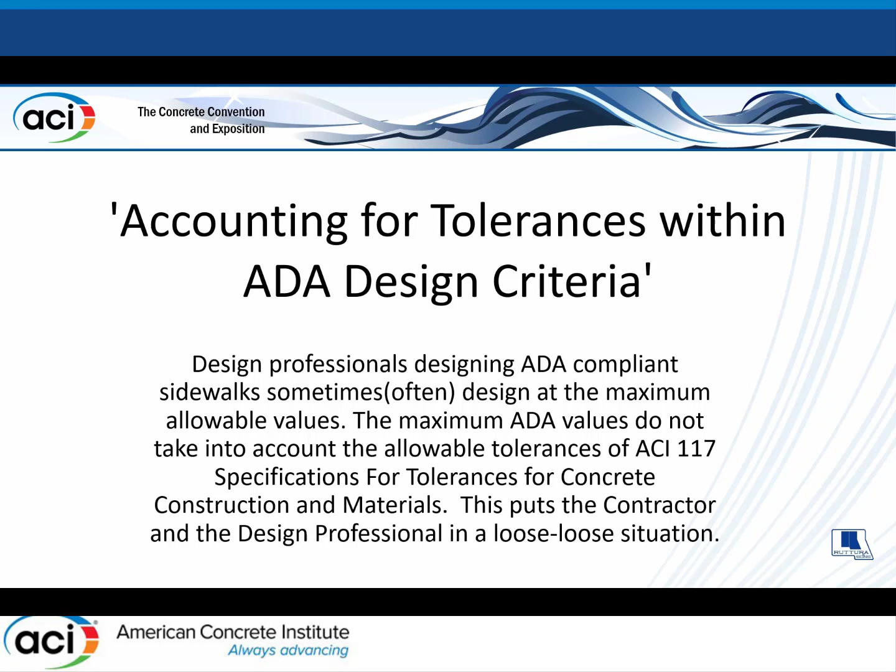So what are we going to do about it? What's the design criteria for sidewalks and ramps? We have 3 numbers we're going to talk about today. If you don't mind, I'm going to step down because I can't stand up on platforms, it aggravates me a lot. So 3 numbers we're going to talk with.

We're going to deal with cross-slope, 2% cross-slope on sidewalks. A lot of people don't realize that if there are blue lines on asphalt pavement or concrete pavement, the 2% is effective there also, in parking lots. Almost no civil designers are designing for that. They just throw contour lines on the ground, and we miss it.

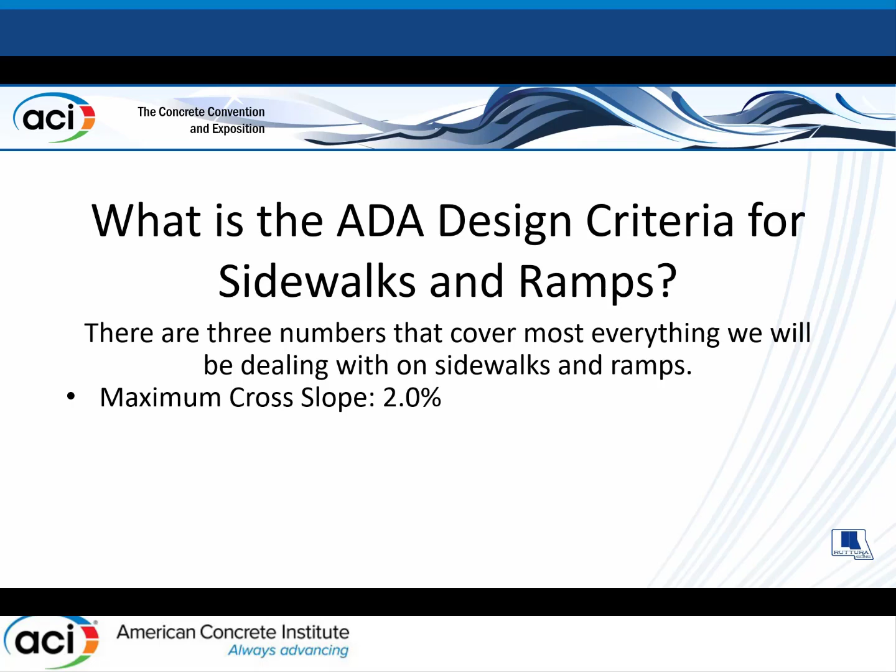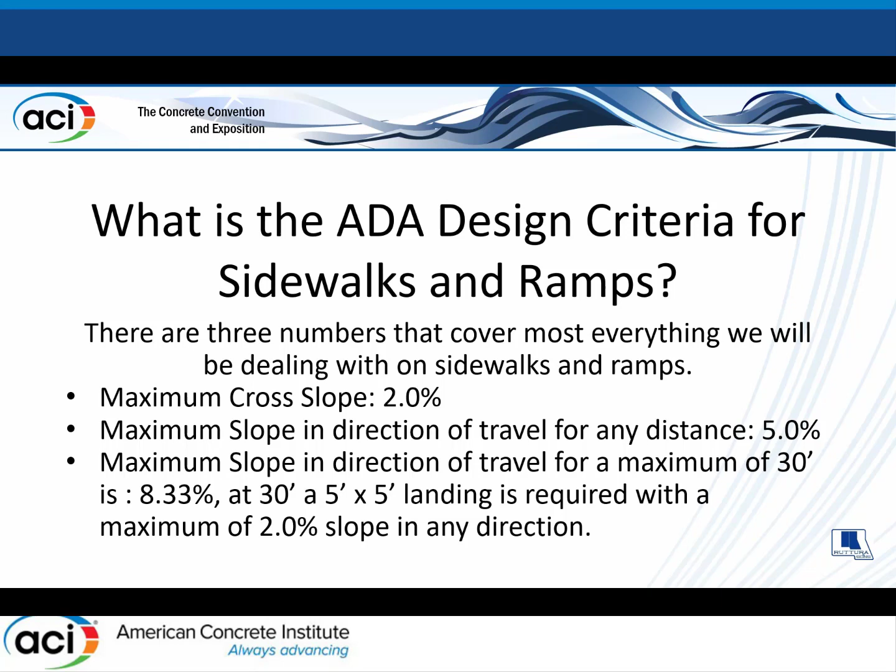Maximum slope in direction of travel for any distance: on a sidewalk, 5%. Maximum slope in the direction of travel for a maximum of 30 feet is 8.33%. At 30 feet, you've got to have a 5x5 landing with a maximum slope in either direction of 2%. It's confusing.

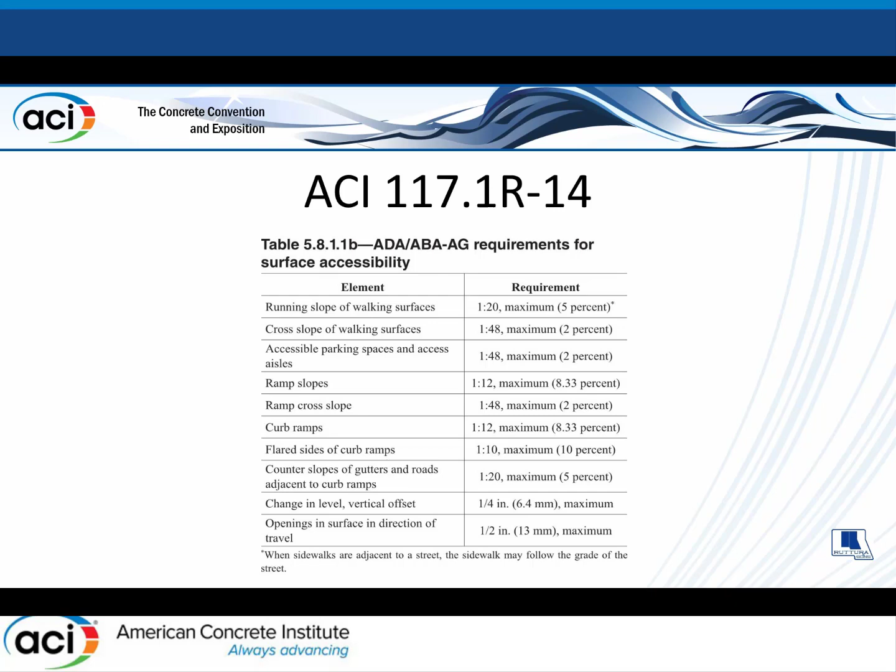117 lists the same requirements. They also add in a 10% for flares at curb ramps. So when you go through a handicapped crosswalk, you could have 10% on the flares on the side.

So what's a reasonable tolerance? The Federal Highway Administration has a best practices guide. For new construction, ADAAG 4.7 permits a maximum curb ramp slope of 8.3%. However, in practice, 8.3% is rarely treated as a maximum, but is used as a design standard that does not allow for construction tolerances. Therefore, rather than using the 8.3, design the curb to 7.1 to allow for recommended construction tolerances.

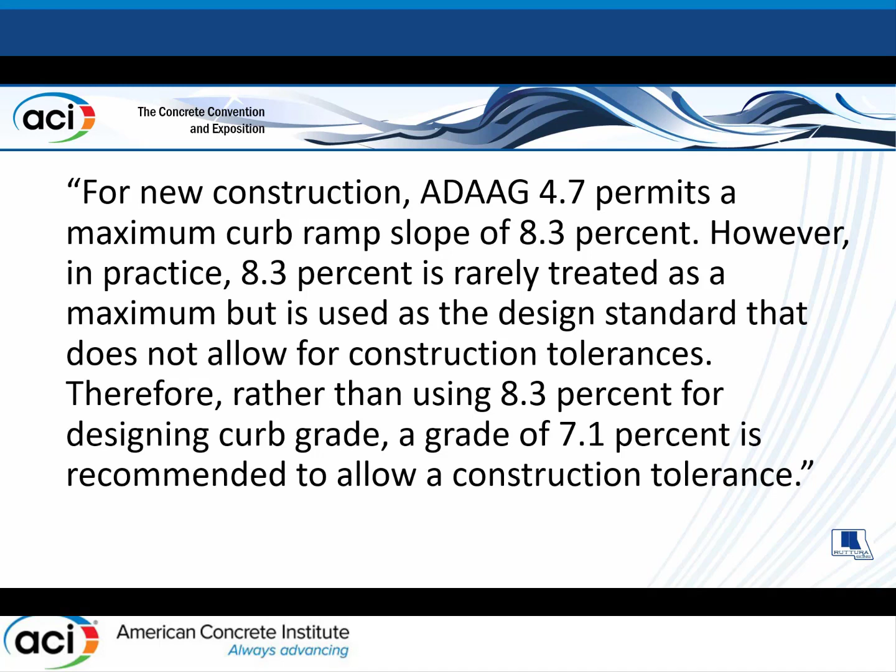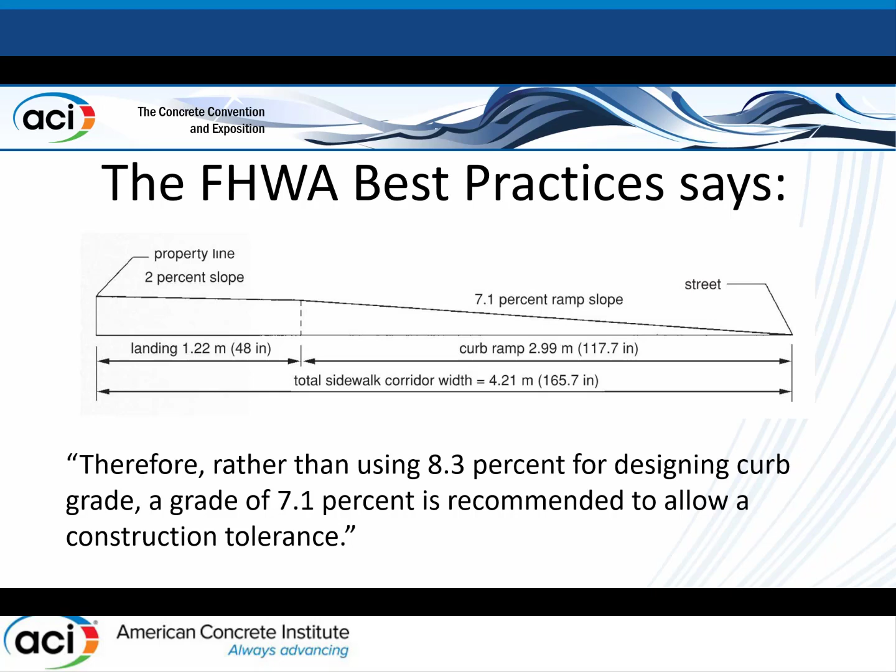Can you imagine a federal agency said that? How nice is that? Refreshing, right? So they're saying design the ramp for 7.1%. Nobody's doing it, everybody's doing 8.3. Contractors just build what they did, right? We're not that smart, you know? We try to do a good job, try to finish it nice, and a week later a guy comes out with a level and checks it, and we have a problem.

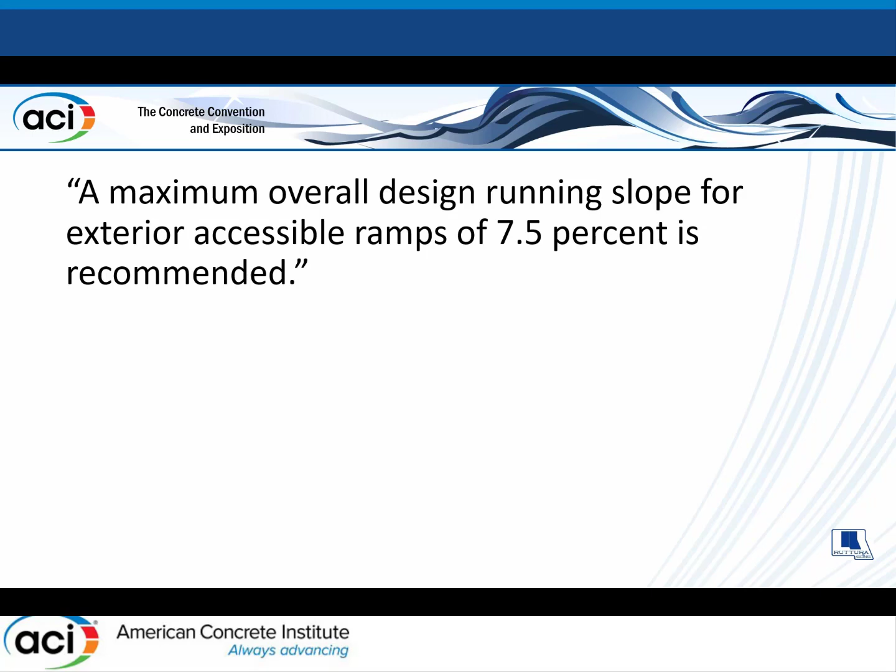So 117 says maximum overall design running slope for exterior ramps should be 7.5%. Well, I like the federal government's pattern better, they say 7.1. Maximum on cross slope, they're recommending 1.5, so you have 0.5% to play with. What's reasonable? A cross slope of 0.5%, 1.2% in any direction of travel, we agree those are reasonable, we should be designing to 1.5, right? On the cross slope, we should be designing to 3.8 on 5, or 7.1 on the 8.3.

The designers are in the room. Do you guys design for slopes allowing for tolerances? Not really, right? We put the maximum on the drawings.

Right? So a lot of times these ramps are between two walls. You've got a handicap ramp sliding coming out of the building, making a 180 degree turn, coming back down. You've designed the walls to fit in a certain area. The walls, in some cases, get put up by one contractor, then the paving contractor comes by and does the ramps. He can't make them work. We end up with a big problem. The owners never have - we're ripping concrete out.

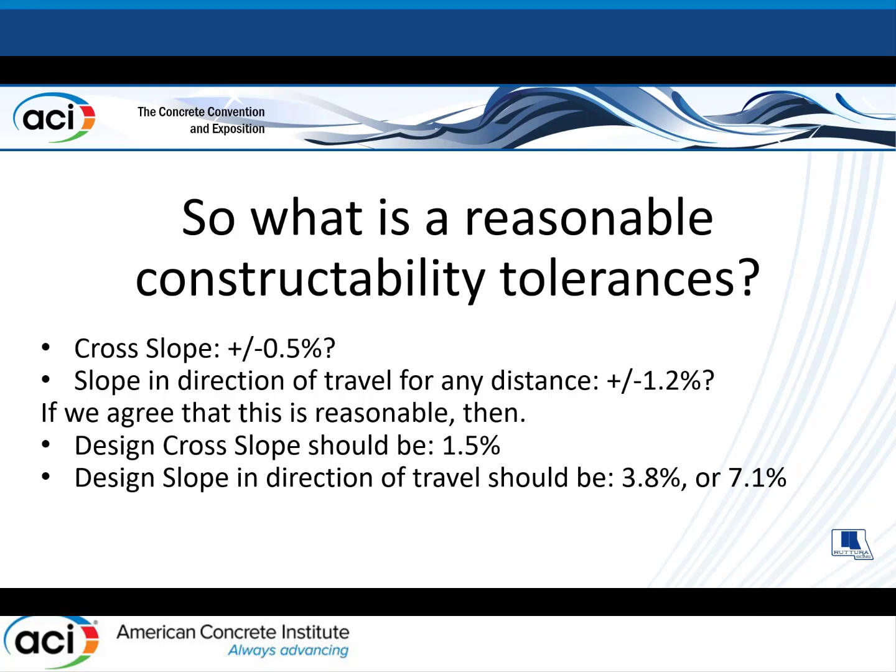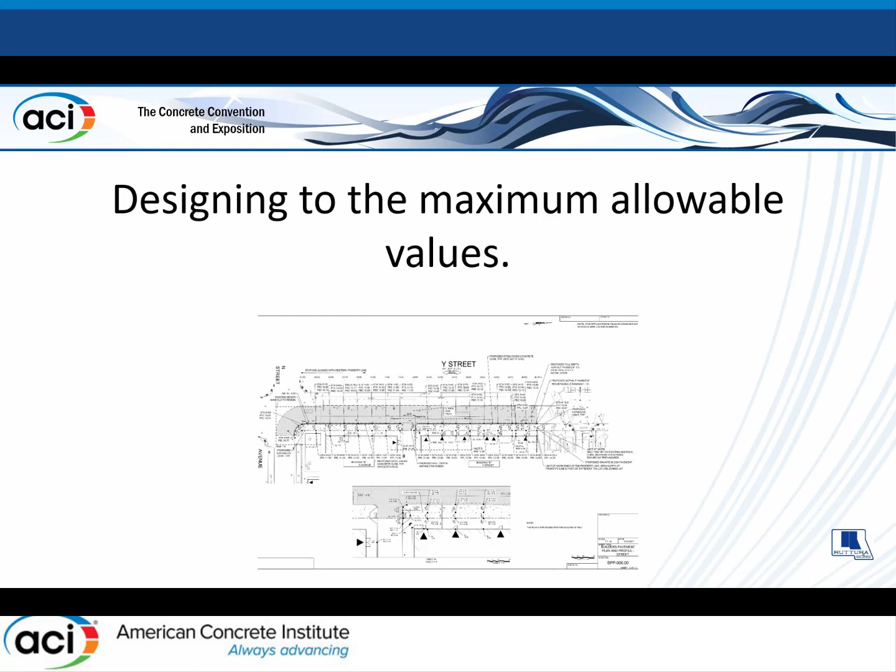So in New York, we do what they call builders paving plans. The city of New York requires every site job - they do engineering on them, and they give us an elevation of the top curb. They give us an elevation at the property line, and they mark on it 2% slope, right? So what could go wrong with this? We've got 2% slope, we've got elevations on both sides.

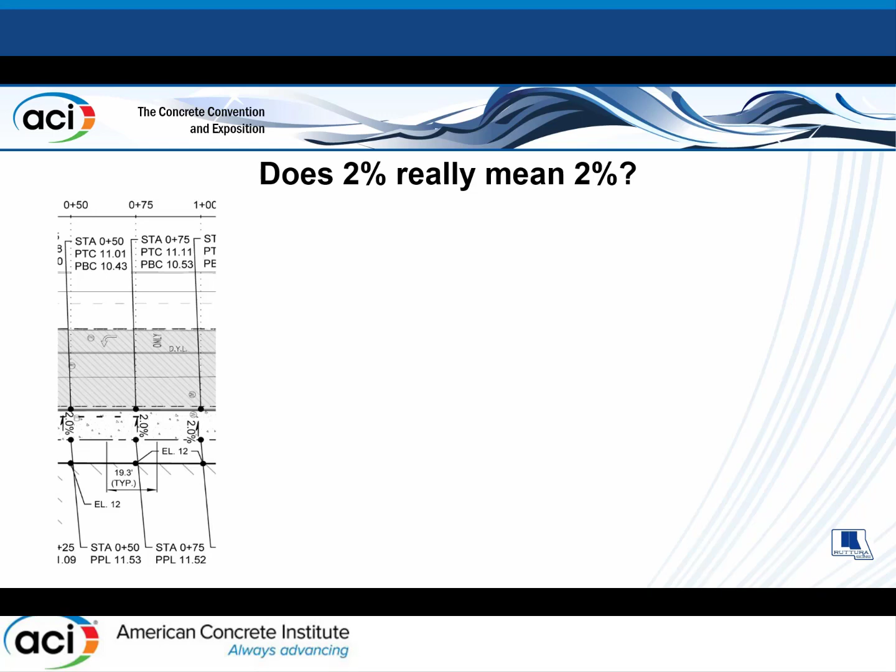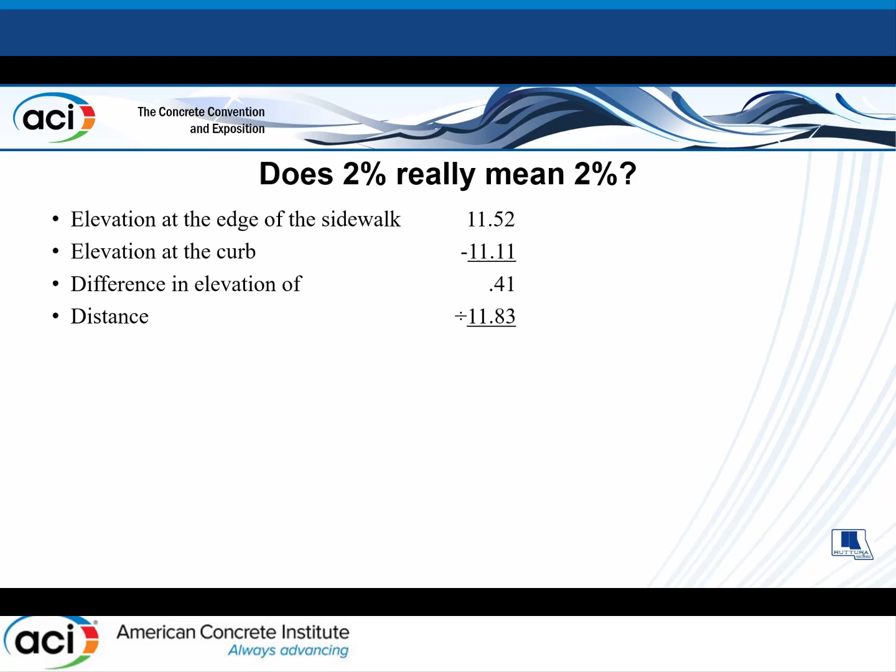Sidewalk's 11 foot 10 inches wide. The elevation at the edge of the sidewalk at the property line is 1152. At the curb, it's 1111. We have a difference of 0.41. The distance is 1110. When we run the numbers, our slope's...

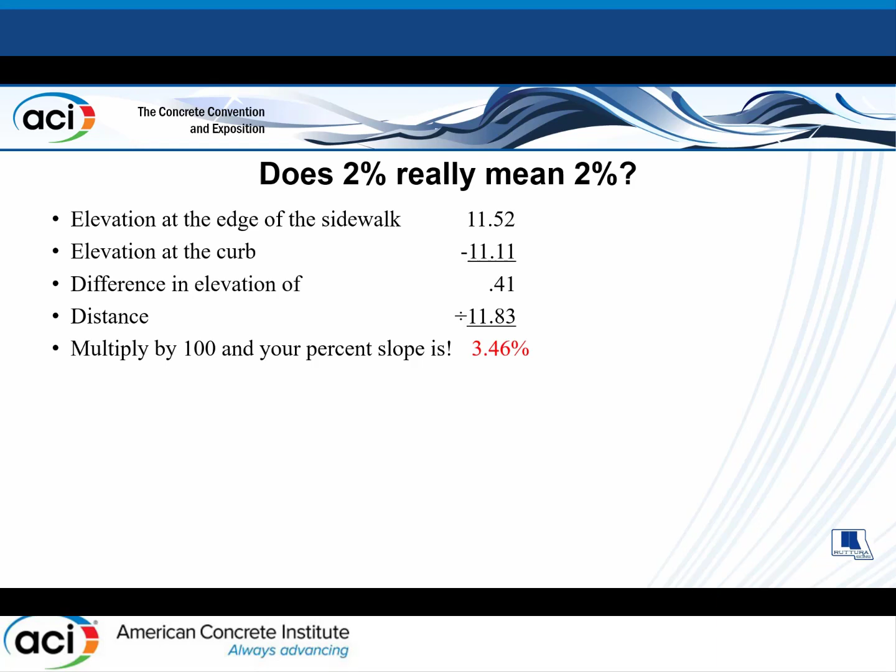3.46, right? How could that be? It says it's 2%, right? We shouldn't have a problem. The problem is, the concrete contractor doesn't do the math. We expected the designers to do the math. It's a hell of an expectation.

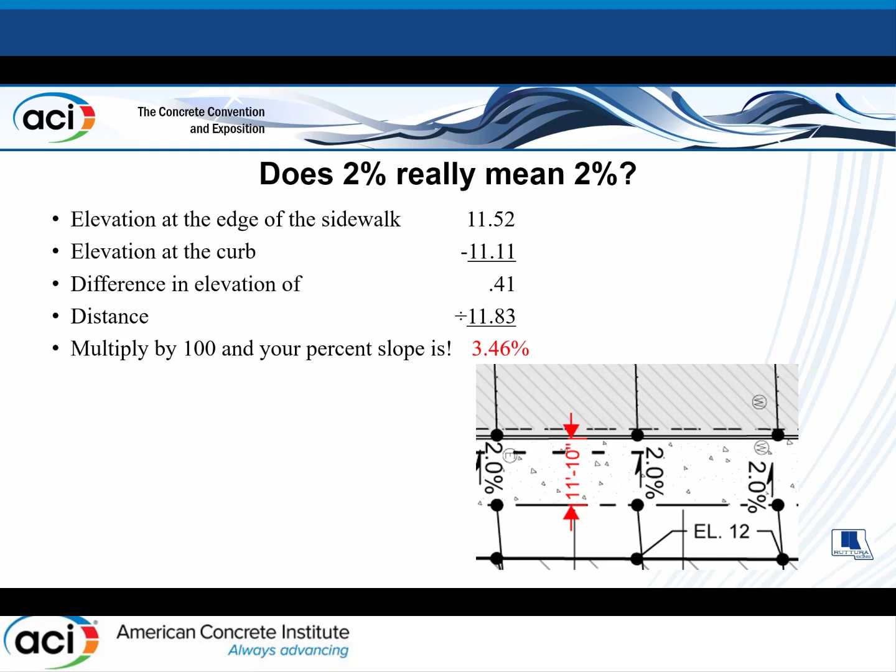So how do we fix this? Because we're getting this everywhere. Every job I'm on today, I have this problem. There's not one I don't have. We're trying to educate people, trying to run out, do pre-placement meetings, talk to the designers.

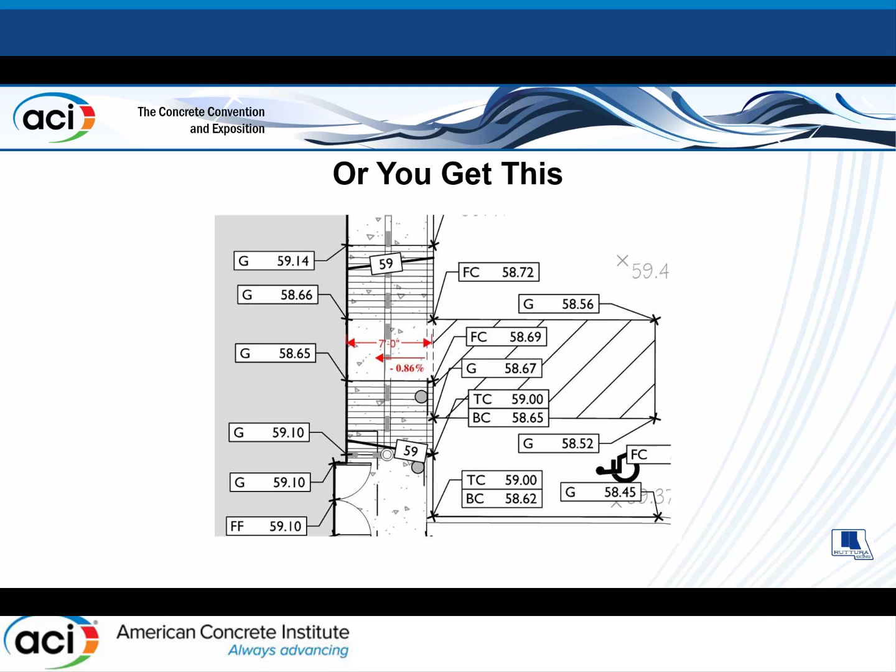This is another one where the designer got everything right. We've got numbers all around this press area here. It's going to an asphalt parking lot. All the numbers are right. We've got 0.86% slope. If you look at the numbers, it's sloping towards the building. So this isn't going to work well. All the numbers work, but we've got a puddle at the building an inch deep.

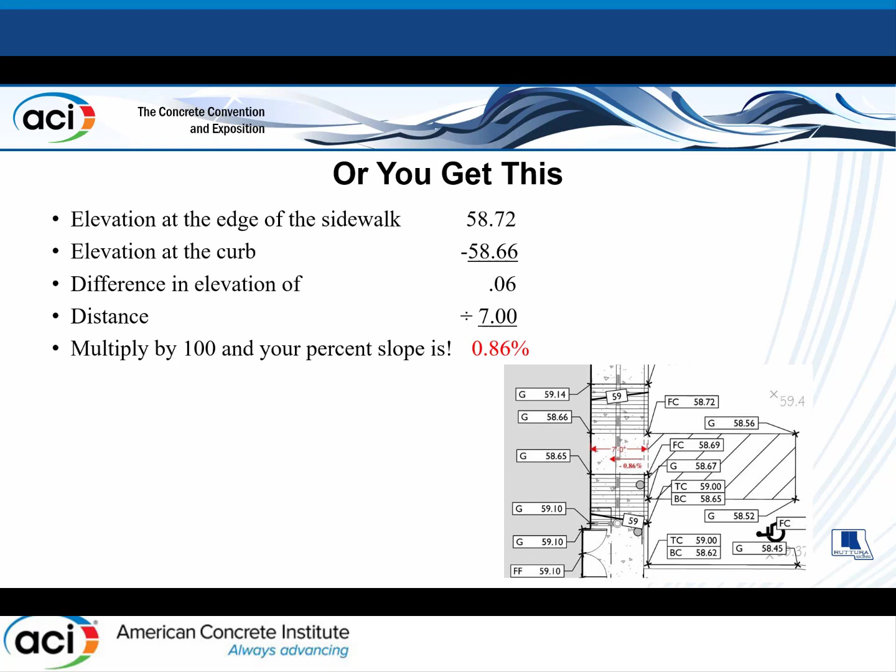When we brought up that we didn't have the correct slopes on the drawings, the numbers didn't work, they drew this dotted line. I didn't know you could do this. So we've got these dotted lines everywhere. If your sidewalks don't slope right, you can designate where the walking path is, right? So he couldn't get the sidewalk numbers to work, so he designated walking paths.

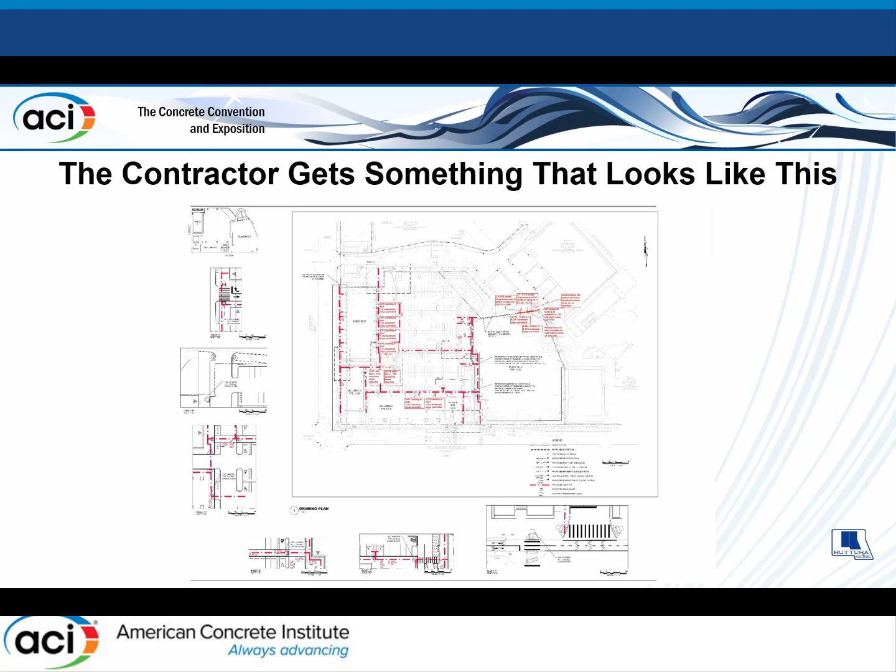That passes muster with the ADA requirements. But when you go out there, there's no way to walk the streets and know where that walking path is supposed to be. So I'm not sure how that works. But meanwhile, we've ripped out about 4,000 square foot of sidewalk on this job.

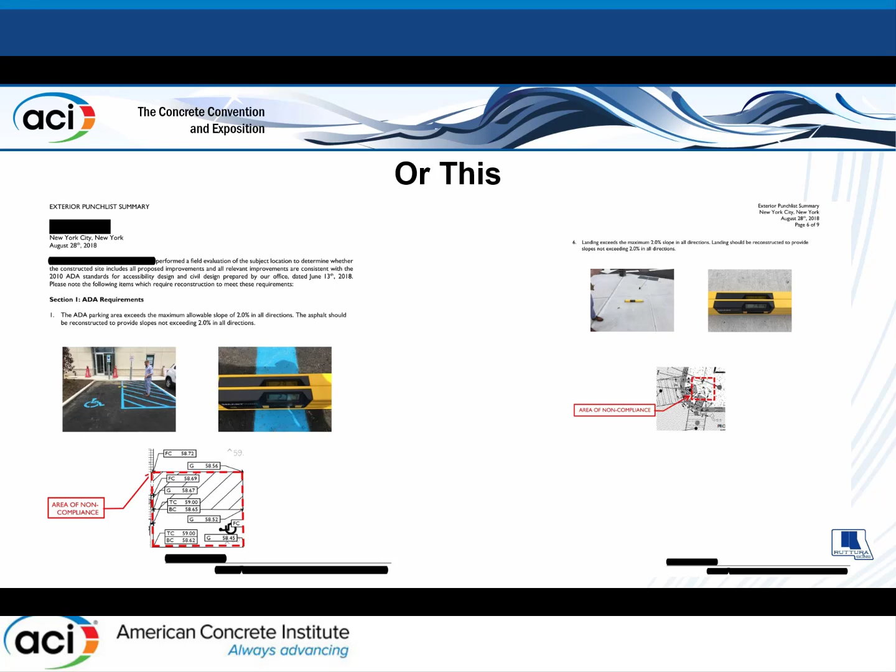And they couldn't make the numbers work, but we had to meet the requirements. Now, you see the level up in the corner here? I'm not sure what the inspector's trying to show me here. Well, he's trying to show me how accurate they are. We've got numbers of 2.7 and 2.9.

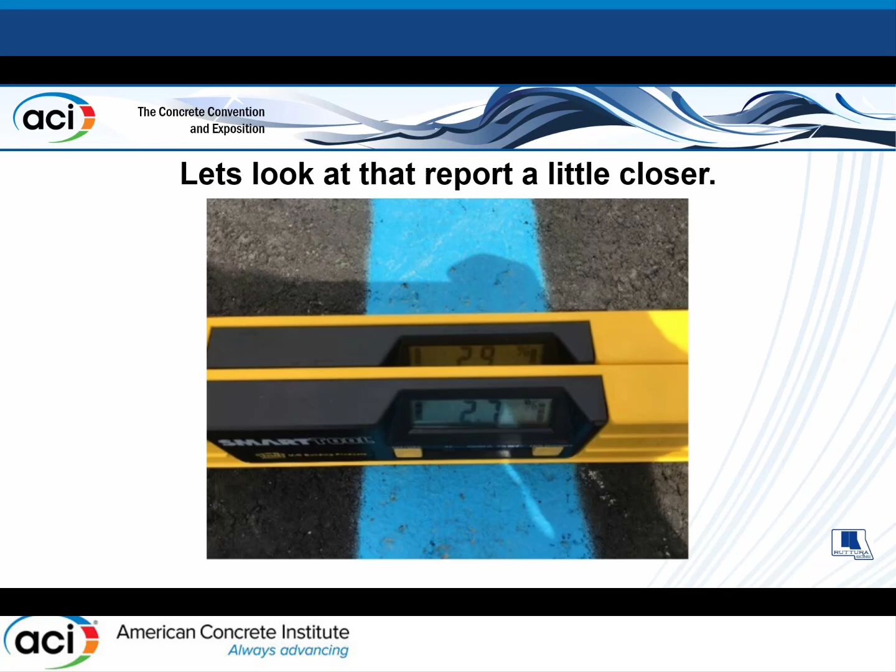I love this because the accuracy of these levels, so the manufacturer says, is 0.2, right? So being that I have a 0.2 difference, I guess it averages, is that right? Is that how tolerances work on accuracy on levels? So what's he implying here? That the slope down the middle is 2.8, or is it 2.5? 0.2 off the bottom line, or 3.1. Either way, I'm wrong because it's supposed to be 2.

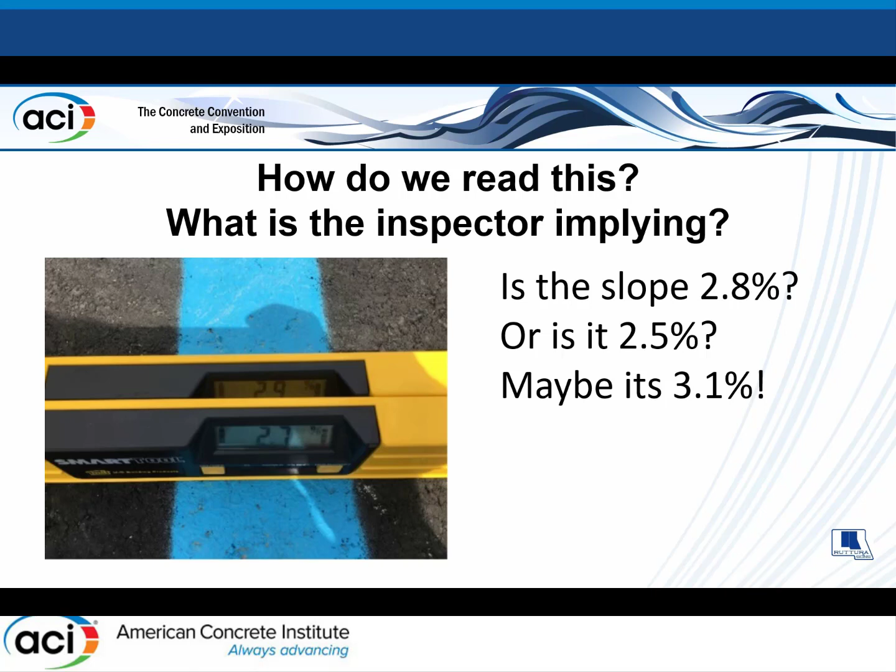But I'm not sure everybody even understands how to measure this stuff. They all come out now with 2 levels, and do you survey on that? No, you can't do that, right? It's wrong. So this is where we are now.

We're ripping concrete out. It happens every day of the week. That's not my picture, but we wear hard hats. This pisses the owners off. It delays the job. It costs me a lot of money.

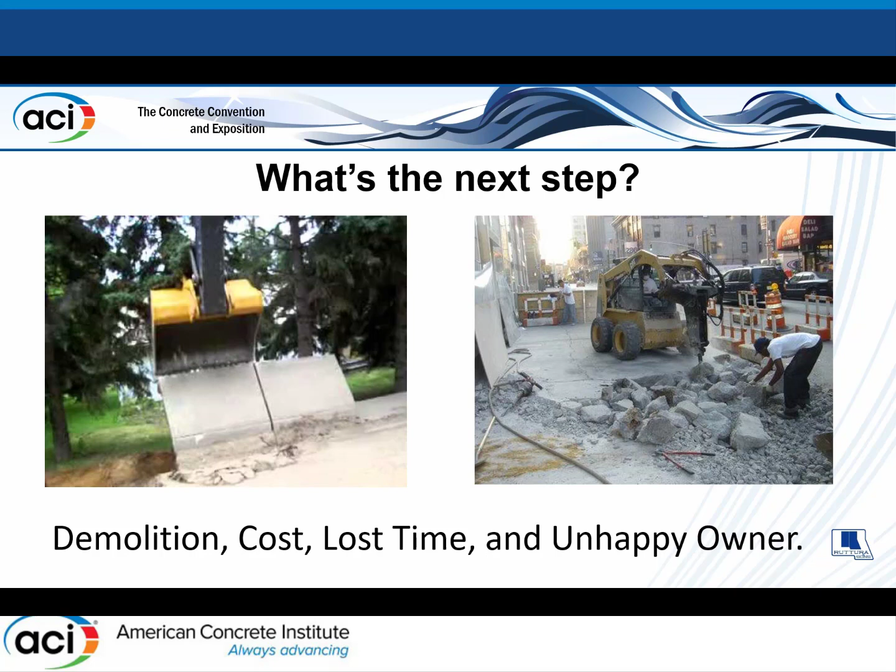I lose my voice because I go fight with people in this area. We bring the engineer up and say, why did you do this? Well, you should have checked it. I should have checked it. So how do we avoid this?

The designers, those of you in the room, let's not design to maximum values. I'm hoping that ACI 117, the next go-round, has mandatory requirements that require you to use the 0.5% tolerance on the cross slope and 1.2 on running slopes.

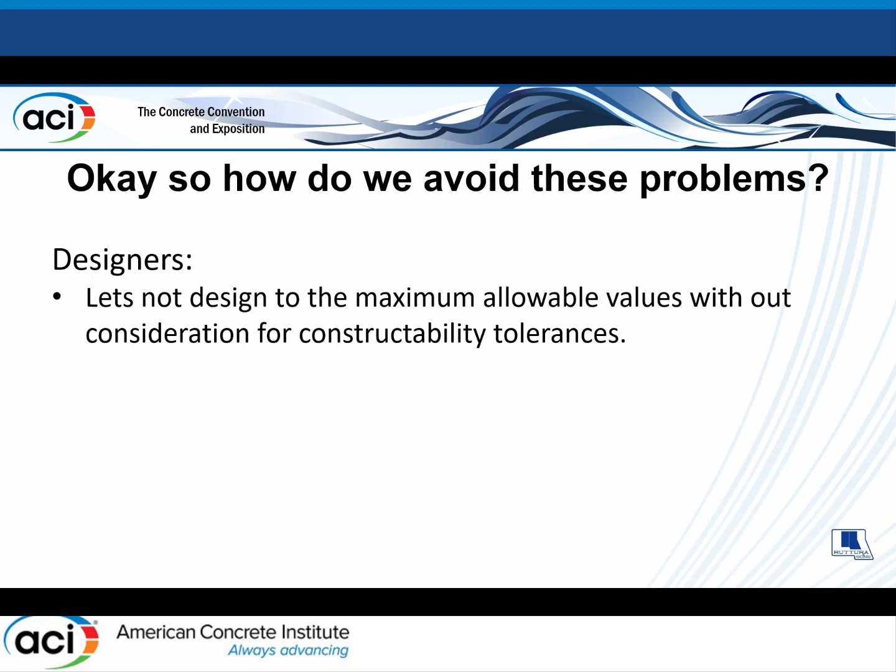Let's not indicate values on the drawing if they're not right. It's so misleading. Again, I kid about it, but we put people out in the field. We're not geniuses. We can't go through the drawings and check everybody's numbers and verify that the stuff you put on the job drawing is right.

And it's pretty disingenuous of you to do that. You couldn't figure it out, so you just throw it out there, let somebody else have the problem. The problem gets really expensive, and you owe the owner more than that. If we can't get the numbers to work, don't put them on the drawings. If you can't get them to work on paper, I sure can't get them to work in the field.

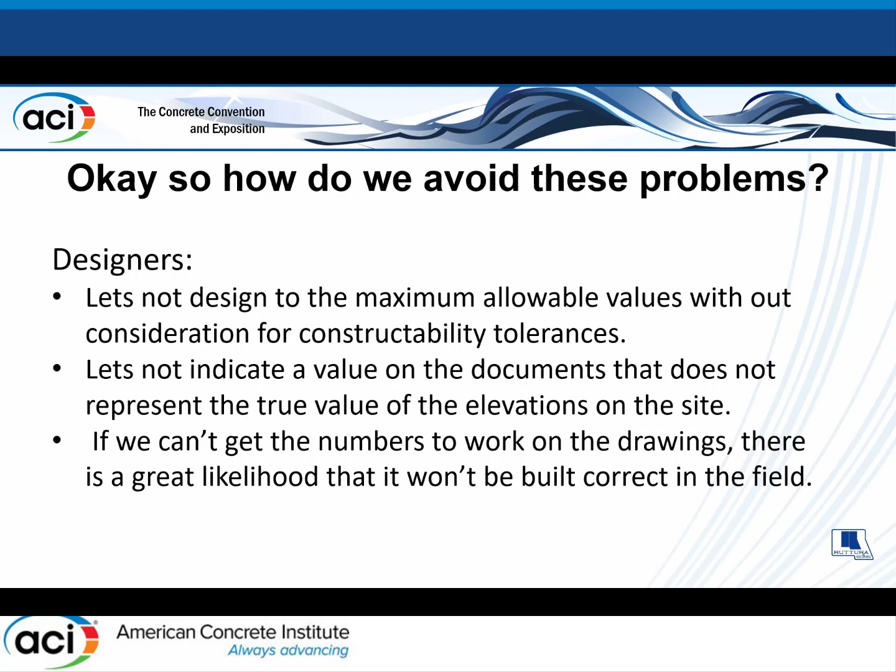It doesn't get better when it gets hard. We've got to make changes. There are ways to modify the original design. Maybe we've got to tell the owner he's got to drop the building 6 inches, and we can't get people out of it, right? Contractors, we've got to look at the drawings.

We've got to make sure the design slopes allow for our tolerances. I was in a meeting the other day with a contractor, and he was seeding stone on top of concrete that I had placed, and he was doing the seeding.

I know my tolerances. I know what I could get it to. The steps weren't perfect, we didn't meet the ADA tolerances on the steps. So everybody looked at me - you placed the concrete, what did you do wrong? I said, I don't know, I placed the concrete.

And this gentleman came and threw stone on top of it, floated it in. Well, it's not me, I could get it within 1/8 of an inch. So he could see the top of the sidewalk in a step and get it within 1/8 of an inch - much better than I could ever get the concrete without seeing.

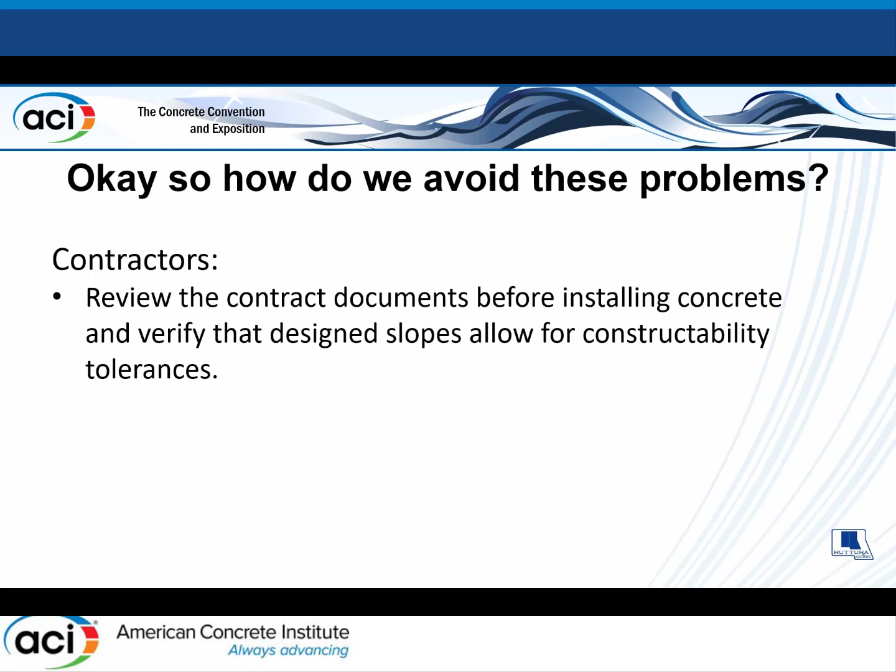We have to know our tolerances. We got to know our limitations. Let's not get out there and pretend we can do things we can't. We need to train our people better. Our field crews need to understand how critical the ADA requirements are.

We've got to care about the quality of what we're producing. You can't go out there and just arbitrarily think because it's drawn, it's right. You can see if things are wrong. You got to pay attention to it. You got to make an effort.

What we do now, we have a spreadsheet. Every sidewalk job that comes through, we put all the numbers in it, and red numbers pop up that don't meet the tolerance. Then there's a way to solve them - do big wide sidewalks.

I just learned this, this year I guess. If I have a 15-foot wide sidewalk, I'm doing 5-foot saw cuts. I could take the middle 5 feet of that sidewalk, put it to 1.5%, and have the other 2 pieces at 5%. Has anybody ever done that?

So I'm doing that, right? But when the owner goes to plow his sidewalk, he's gouging the top. He's got ice piled up 4 inches in the middle of it. It works, but it solves the problem for me - it creates another problem for the owner, because we didn't think about these things up front.

If we see a problem, let's address it. Let's bring it up with the design team. Don't be afraid to look stupid - look, I'm up here talking to you guys. You got to be able to reach out to people and tell them, I don't think this works.

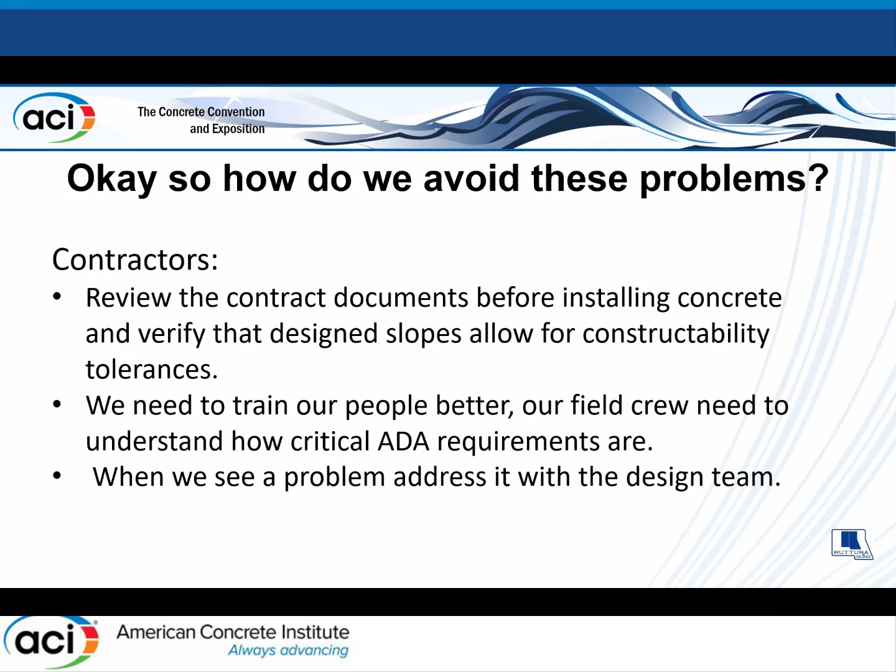That's all I have. Does anybody have questions? No? All right. Am I early?

I'm sorry, yes sir. There's some discussion in ADA about this, I believe. Am I dreaming - isn't there a clause in there that recommends or warns designers to not design dimensions at the maximum tolerance?

They do say that, but it's happening. The Federal Highway Administration says it, but it's happening. ACI says it, but it's happening. It's not only designing to the max, but they're designing way over the max and labeling it at the max. And it's not uncommon, truly not uncommon. So I don't know how we fix it other than trying to educate people.

Everybody recommends - ADA, Federal Highway Administration - they recommend designing to a tolerance. What we're trying to get is mandatory that you design for a tolerance. And I'm hoping ACI takes the lead on that next year.

Anybody else? We got progressive engineers - they're designing to 4.9% now, so they're doing us some big favors at a typical sidewalk. But there's so many tolerances too, just in the design - in the survey that was done based on the design, and then the stakes the surveyor gives you. We're taking up your tolerance, and you haven't even built your form yet.